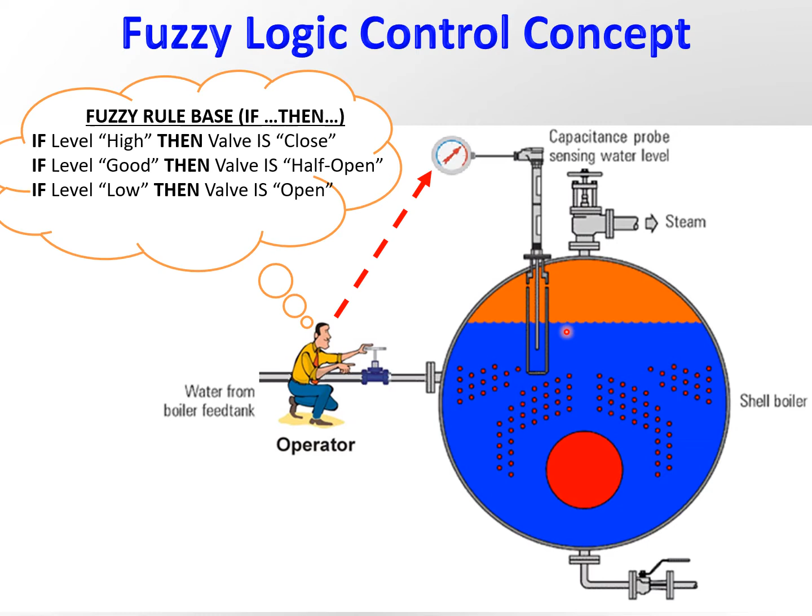The advantage of fuzzy logic is that it's comparatively easier than developing a model based where you have to get models and all that. It's robust in general, more robust than PID because of the capability to cover a huge range of operating conditions in a knowledge system, as mentioned before.

It can be customized to different areas and different systems, basically emulating human deductive thinking, as we've seen before in the example of controlling the boiler, designed to emulate human deductive thinking and to infer conclusions from what we already know. It's more reliable than conventional methods in non-linear systems normally, and is generally more efficient when applied in control systems in general, not specifically, but in general.

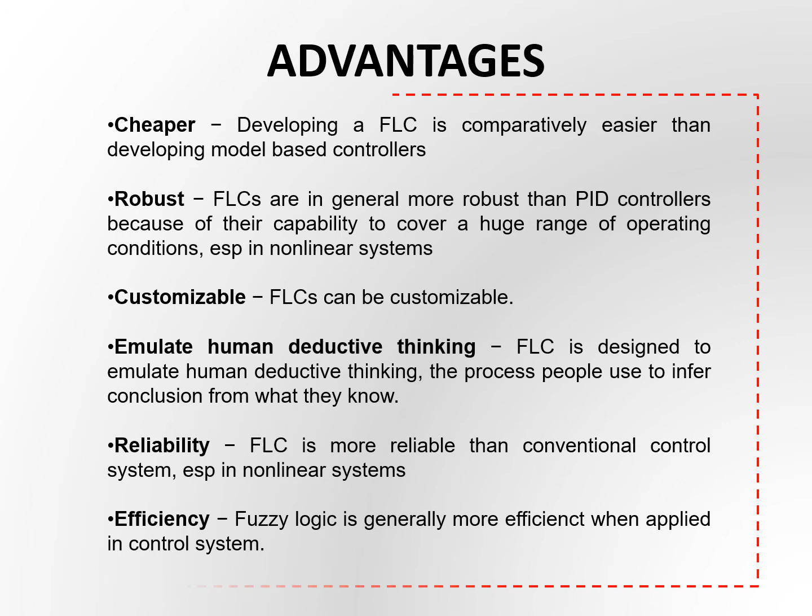Disadvantages: well, it requires lots of data. You need historical data to be able to design your fuzzy rule base, or you need human expertise. The accuracy of the system depends on the knowledge and expertise of the human beings in developing the rule base, and these rules must be updated from time to time.

Looking at the control system, as we've seen before in your process control class, we have the controller, final controller, process, and measurement device. So the same loop applies, except now the controller would be the AI or fuzzy logic controller, and the others should be similar in terms of the final control process and measurement device, but we may have more than just one measurement. The structure may slightly change, and the controller will change.

That defines the advanced control strategy. So why is this called advanced? Because of this issue of the difference in terms of structure and the controller itself.

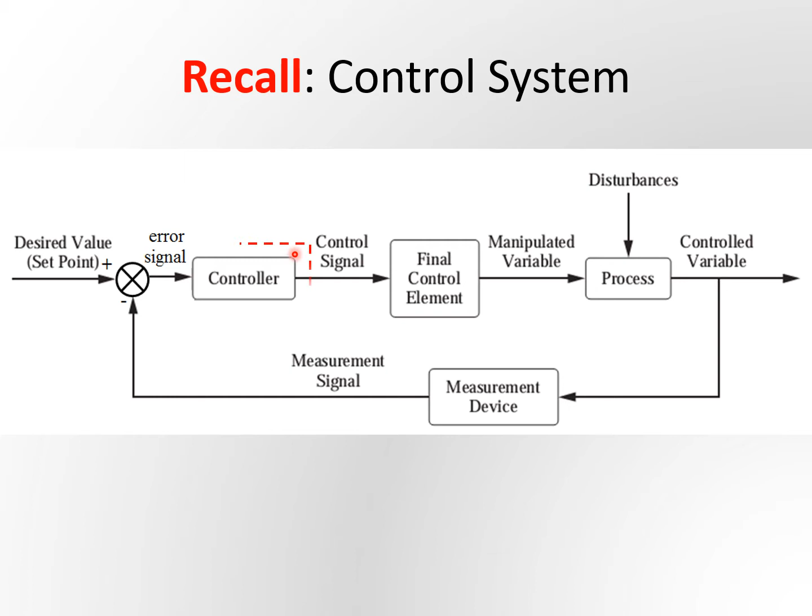For the fuzzy logic controller, we have the components mentioned before in the introduction class: the fuzzifier, which transforms the input data into fuzzy sets, the inference mechanism, and the fuzzy rule base as one part of the fuzzy logic controller. Finally, we get a few rules that fire, then we come up with the aggregation part where you come up with a fixed value from the defuzzifier. The defuzzifier converts fuzzy data to crisp, non-fuzzy, real data. There are two methods, but there are other methods as well.

There are four elements in the fuzzy logic controller. One is the rule base, premise, then consequent, which contains the logic quantification of the expert's linguistic description of how to achieve good control. The inference mechanism emulates decision making by interpreting and applying knowledge about how best to control the plant. The fuzzification process converts the inputs into antecedent fuzzy sets that can be used to activate and apply rules, and the defuzzification converts the action of the inference mechanism into actual inputs for the process. These are the four elements mentioned before.

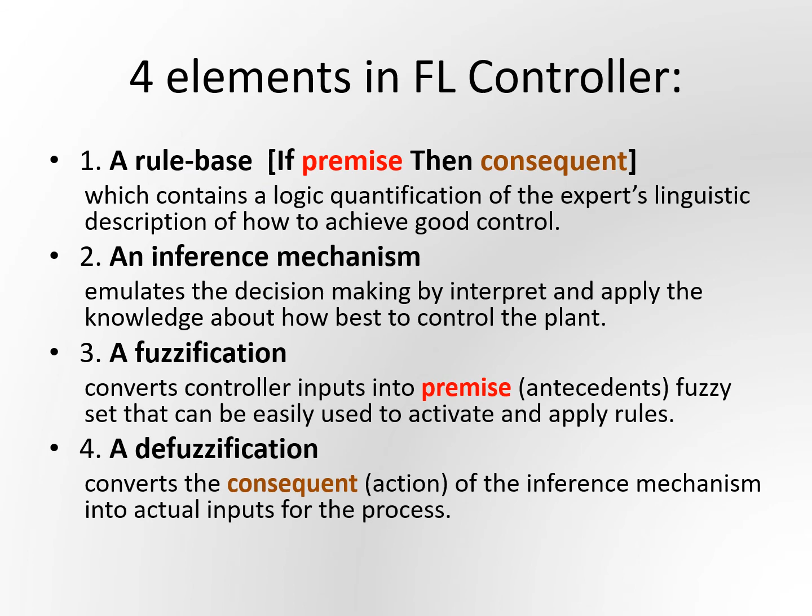Fuzzy logic design methodology: first is to choose the fuzzy controller inputs and outputs, then put the control knowledge into the rule base, then the fuzzy quantification of the knowledge, then matching which rules to use, then determining the conclusions from the many different rules fired, and finally converting the decision into actual action into the real plant. These are the methodology steps that we have to follow.

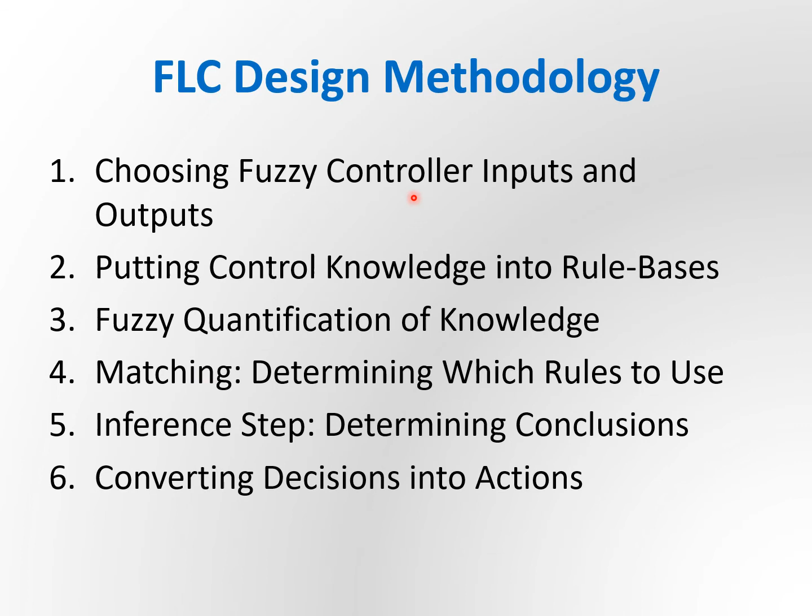The first step in FLC design methodology is choosing the fuzzy controller input and output. The expert knowledge will tell us which should be used as the input.

So there are many choices, but normally in some process, the first one is the error, set point minus the actual, and the change in error is also important. This relates to the process input values. The output depends on what you're trying to manipulate, and normally relates to the final element, how we can manipulate the process variable, in this case like height. So the output could be the valve opening and closing, or CV percentage, as we call it.

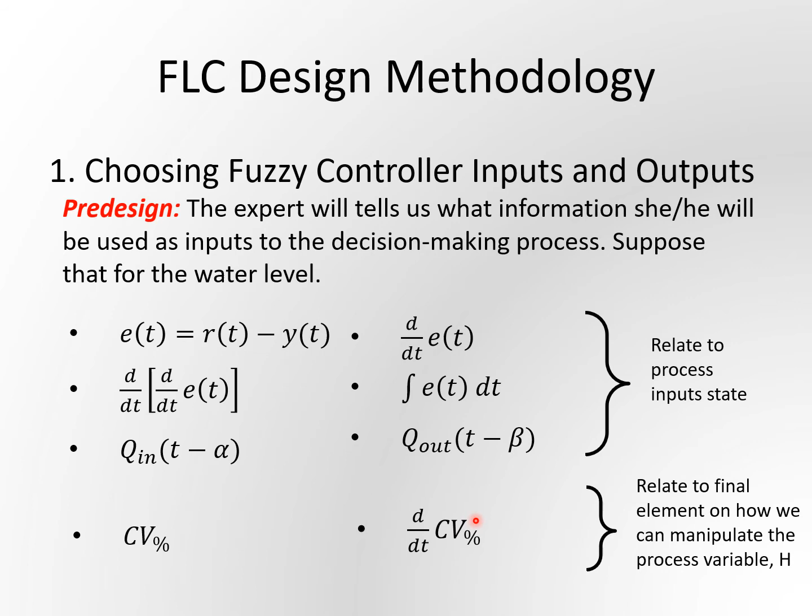In choosing the fuzzy control inputs and output, we define the linguistic variable for each of the input and output. For error, described as E, and change in error, described as the change in error - these are the variables. And the output, the valve rate, defined as the change in the valve opening. For each of them, we define its linguistic members, or linguistic values.

For input 1, we define the linguistic variable error into different linguistic members: negative large, negative small, zero, positive small, and positive large - 5 members. For the change in error, as input 2, we define 3 members: negative, zero, and positive. And for the output, as the valve rate, we define a few members: close fast, close slow, no change, open slow, and open fast - 5 other members for the output value.

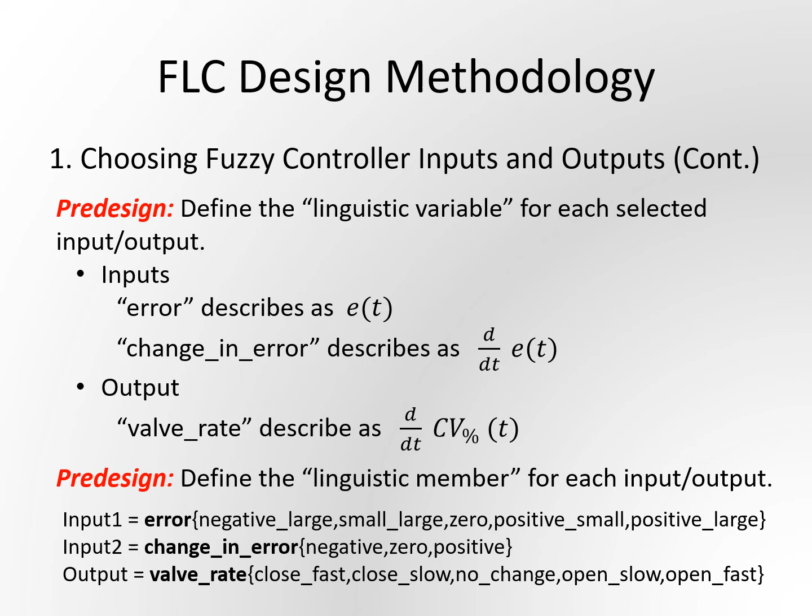So this is the fuzzy membership linguistic variables and fuzzy linguistic members. Next we go to the fuzzy membership. Before that, we would like to put them into a rule base. Suppose that the human knows a certain function of the plant in some natural language, so we can set up this matrix sort of thing.

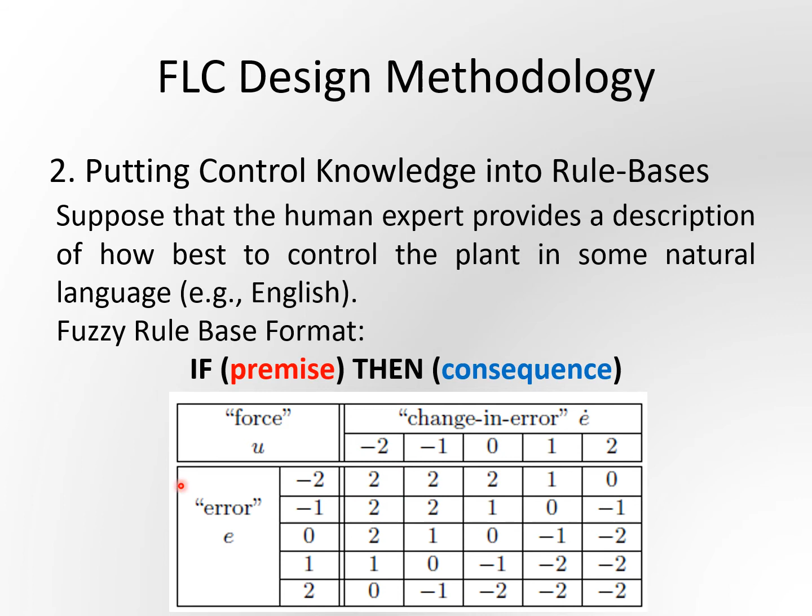We've been talking about this, but before that we also have to decide which membership function these members lie in. If you'd like to use a triangular, then you have to decide the triangular - what sort, giving the details of the beginning, middle, end, and so on. If you want to use a trapezoidal, then decide the trapezoidal definition or specification. If you want a Gaussian, decide the Gaussian, and so on. There are a few more, but these are the 3 common membership functions we define for the linguistic.

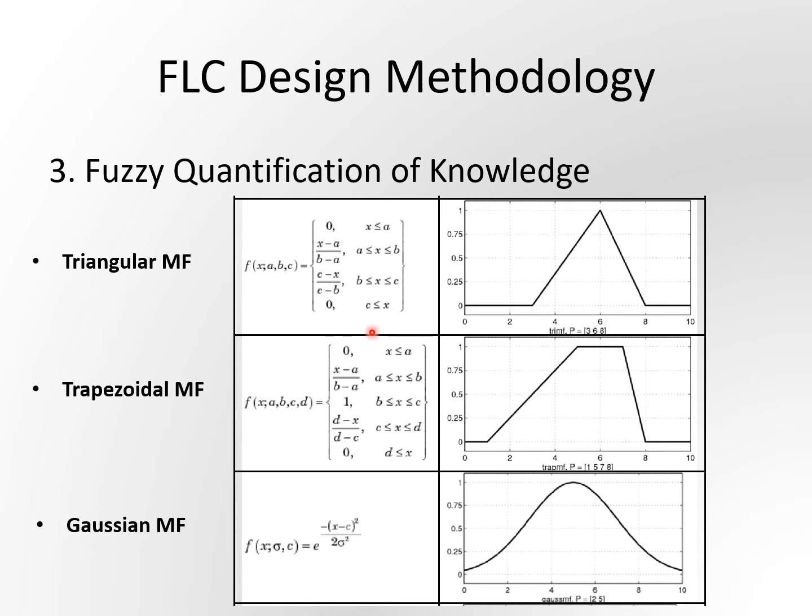Finally, we want to match - as we said before, we want to match the rules - once we have the input values. For example, if we have an input E equals 0 and change in E equals 0.3, then we have 2 rules fired here. Looking at this: error is 0 and change in error is 0, and error is 0.

If one rule is fired where change in error is 0, then we can use this rule - basically 0 here, the force is 0. Another rule: if error is 0, change in error is positive small, then the force is negative small - another rule is being fired. So these are the rules we have fired based on the input that comes in, in terms of the linguistic variables we have chosen, and in terms of the rules we have given.

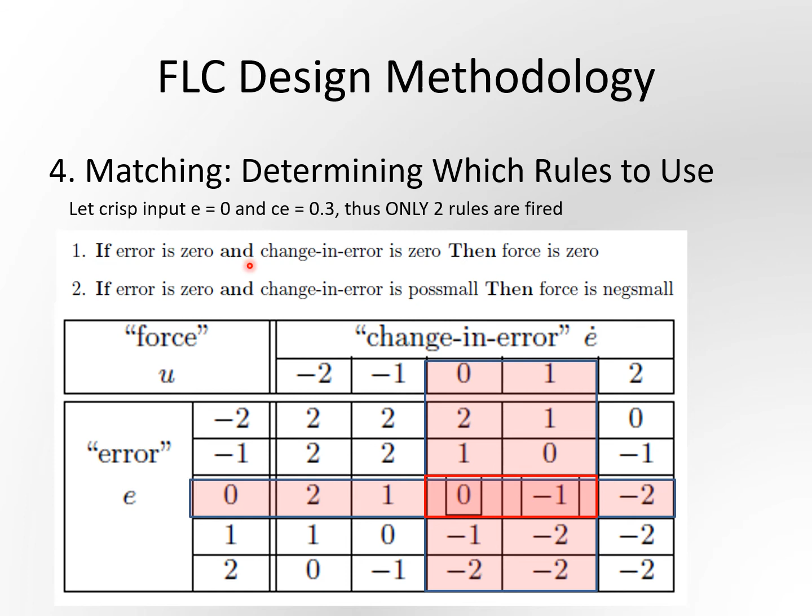So in this case, when we have change in error of 0.3, as I said, we can fire 2 rules: one with the 0 membership function, and one with the positive small membership function. Mu is what we call the degree of membership, from 0 to 1. So when we fire the degree of membership for 0.3 and 0, we get a value of 0.25 and 1 for the 0 part. And when we use the rules, we normally choose the minimum of them - take the minimum of those two, which is 0.25.

The other membership function for the other rules fires at 0.75 with the 0,1. Using the AND rule, we take the minimum of them, which is 0.75. So two rules are fired here: one with the 0 membership function at 0.25 degree of membership, and another rule using the negative small membership function at 0.75 degree of membership.

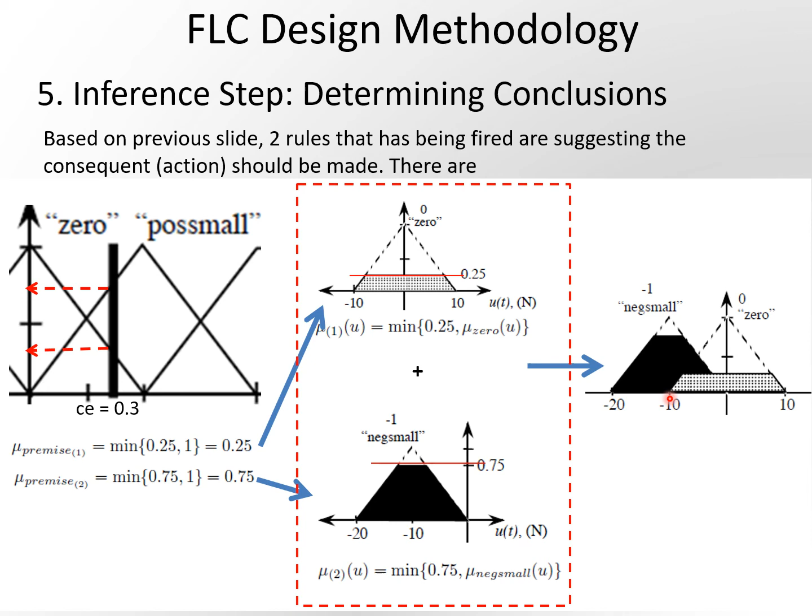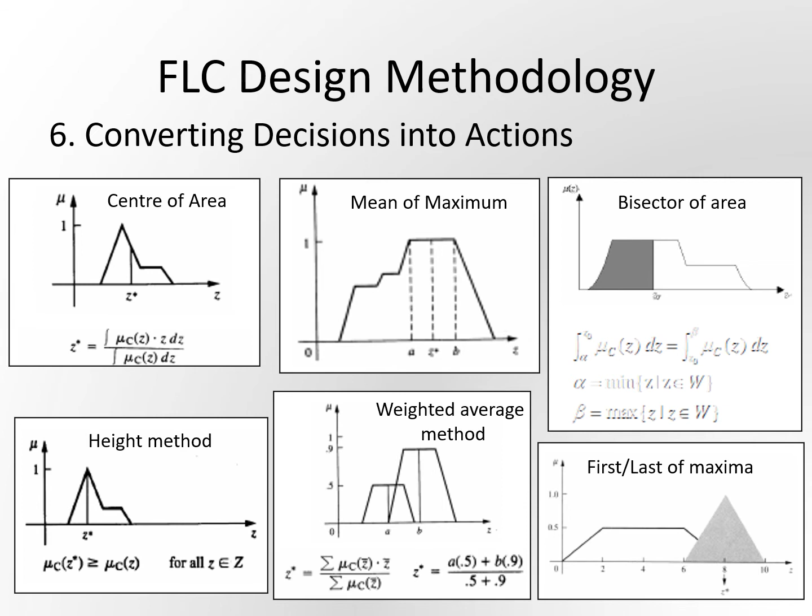So we go through converting the decision into action using the defuzzification method. We can use different methods: center of area, mean of maximum, and so on. Normally we use the center of area, or the centroid, or center of gravity method to decide, among the different rules fired, what is the final result. So we will use that defuzzification method.

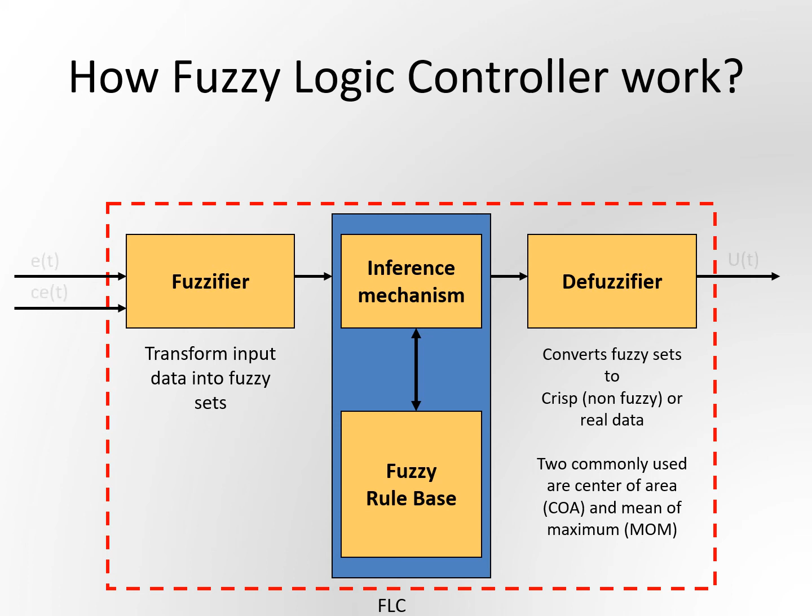We'll take an example now. If we use the crisp input E equals minus 0.5, and the crisp input for change of error is 0.6, we have two linguistic variables used. We call it, in this case, the linguistic membership in terms of x1 or y1, and the membership function is a1, a2, or a3 for the input x1. For y1, the membership function is b1 or b2, trapezoidal b1 or trapezoidal b2. So these are the two different categories of inputs.

The membership function for A1 will be 0.5, and the membership function for B1 will be 0.1. The second one, membership function for A2 will be 0.2, and the membership function for B2 will be 0.7. So these are the inputs that have been converted into fuzzy linguistic variables and their values.

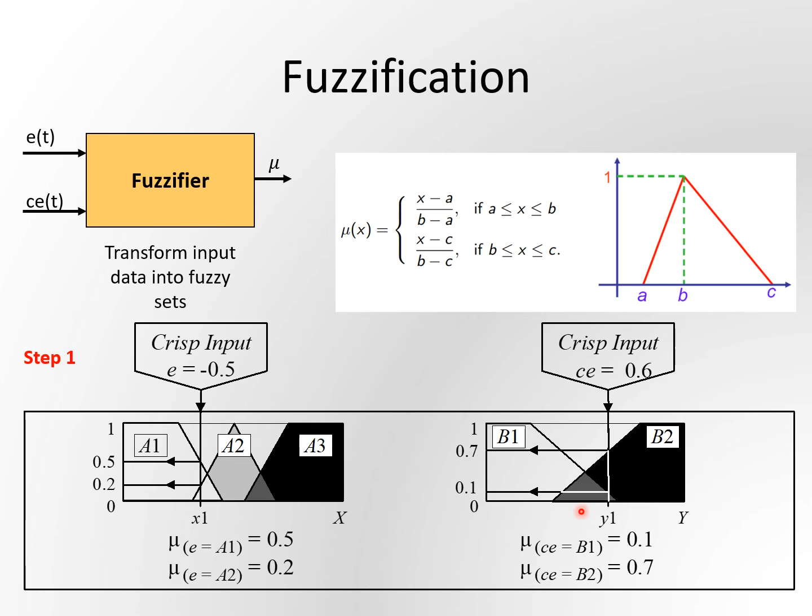And we have the rules already set: if E is A3 or CE is B1, then Z is C1, the membership function of the output. The other rule: if E is A2 and CE is B2 — B2 being the membership function for the inputs — using AND, then Z is the C2 membership function of the output. And rule 3: if E is A1, then Z is C3.

This is the inference mechanism combined with the fuzzy rule base to come up with a degree of membership and decide which rules to follow. So we said if A3 is fired and B1 is fired, then we use the OR value, which normally means the maximum of the values, which is 0.1. So C1 is fired with 0.1 degree of membership. If X is A3 or CE is B1, then Z is C1, with degree of membership 0.1.

For the other rule, if X is A2, triangular shape, and CE is B2, trapezoidal shape, we get a degree of membership of 0.2 and 0.7 respectively. With AND, normally we take the minimum, so the minimum of these is 0.2. So it's a 0.2 degree of membership for the output at C2 membership function, the trapezoidal membership function.

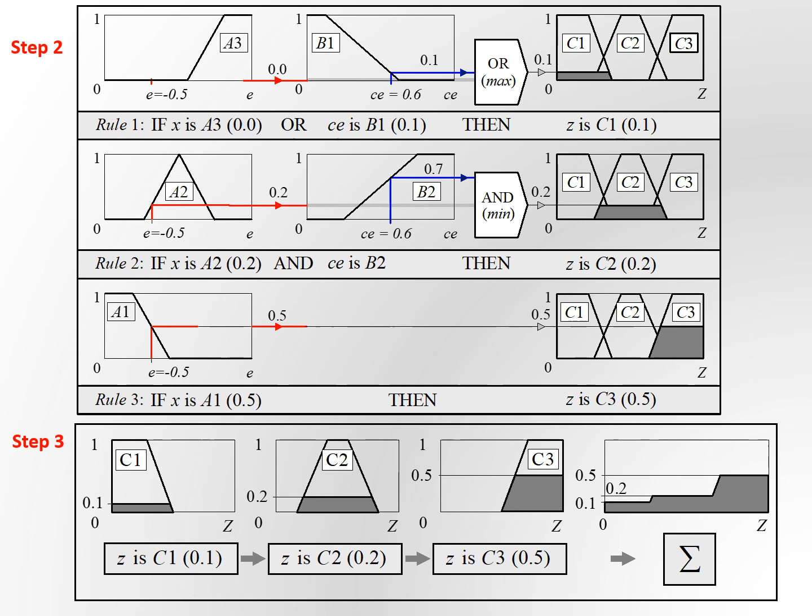So we combine and aggregate them to get the final rules output combined together, and then finally we have to use the defuzzification method to get just one output. You want only one output at the end. To do this, whether we want to use center of area, center of gravity, mean of maximum, whatever method we want to implement, we can just apply it.

In this case, we use the center of gravity, which is given basically by the area of the different parts plus this part, divided by the degree of membership for each of the different parts, 0.1, 0.2, and so on. So this is the way of calculating center of gravity. So the final value we get is...

67.4, and this is the crisp value, or the definite value, or the real value that has been defuzzified. The whole system has defuzzified. This is the value that is going to the output.

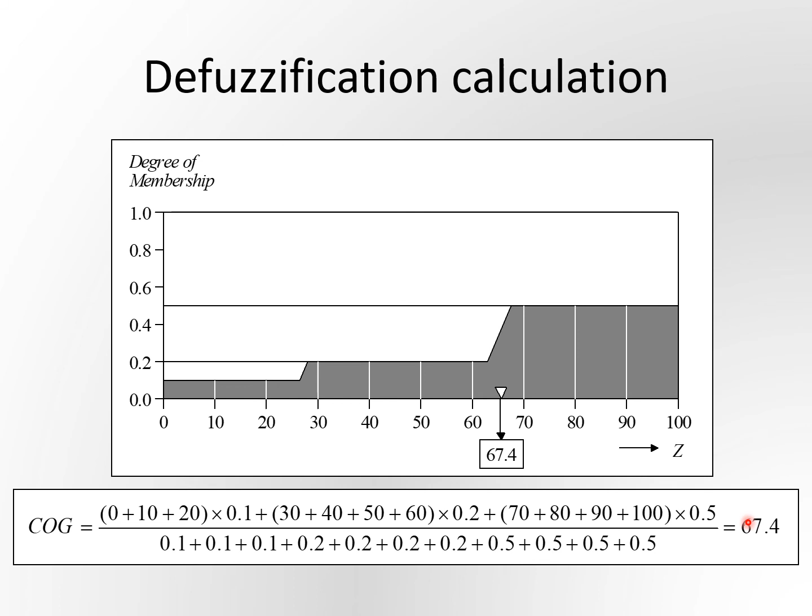That is the one that is applied. So this is the whole steps of a fuzzy logic controller, in this case controller, or any others that you may use, if not a controller. That's the way how fuzzy logic is going to work. But in that case, it was a controller because we talk about errors and so on.

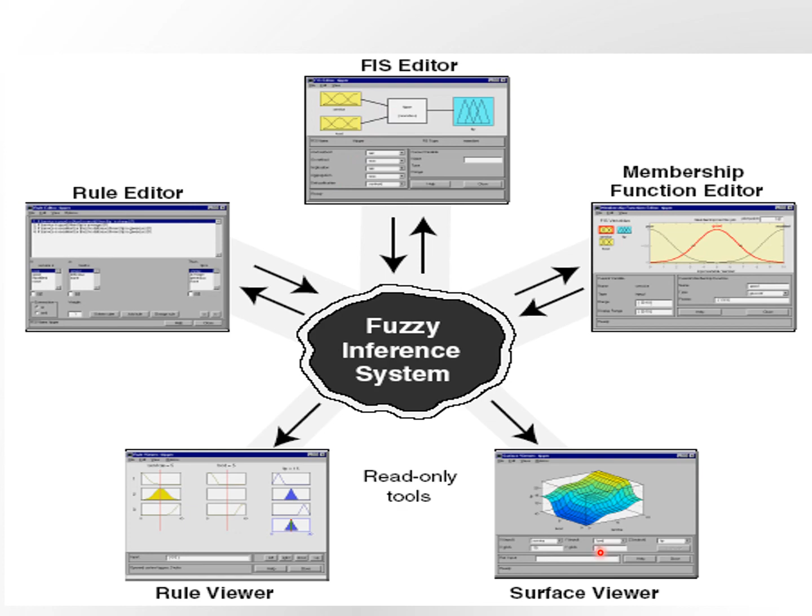And basically, we're going to use the MATLAB interface and choose the fuzzy inference system editor, the membership function editor, the rule editor, and surface viewer. As I mentioned before, these are the different parts of the MATLAB toolbox for fuzzy logic that we can use to design our system.

So we can define the input, output, and so on. Decide the linguistic variables and form the fuzzy associative matrix.

In this case we have the linguistic variables for error and rate, and the values such as increase, no rate, decrease, low, good, high for the inputs, and the output as open, mid open, and so on.

So it depends on how you define the linguistic variables and their values, in terms of fuzzy values, yeah, open, mid close, and so on. Just now we talked about tall, short, fast, loud, in terms of the linguistic variable height and so on. So these are the tables we can use.

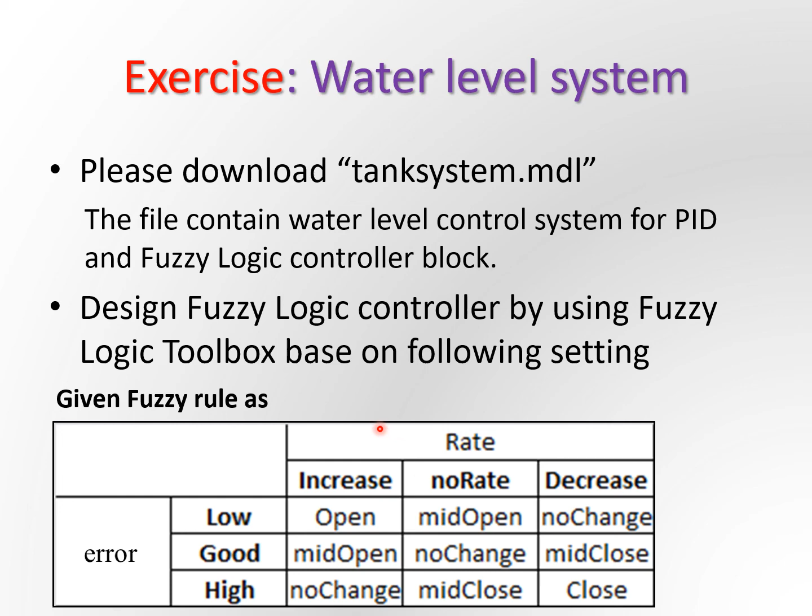These are the fuzzy rules we use, and then all the other steps that we have mentioned before in the fuzzy logic toolbox.

The difference is in the defuzzification part, where the output is a function of all the different rules fired - function of the first rule, function of second rule, plus the function of the rule, to get out the Sugeno output.

But Mamdani output is what we have studied before - different rules fired, aggregate them, implement the defuzzification, and get the output. So it doesn't matter which method you use, but in the toolbox, most of the time we can easily use Mamdani because it's so very user friendly.

And so we decide the AND method, what sort of method we use, the OR method, or so on, what are the inputs, and what are the range of the inputs, what the membership function, input 2, what is the range, and what is the membership function, output, what is the range, what is the membership function, what is the name, and so on.

So define this specification into the MATLAB toolbox for fuzzy logic, and then we can easily design any controller, any system we want. As long as we know the basics, as I said, the way we choose the variables, the output, the range, the membership functions, all makes a difference.

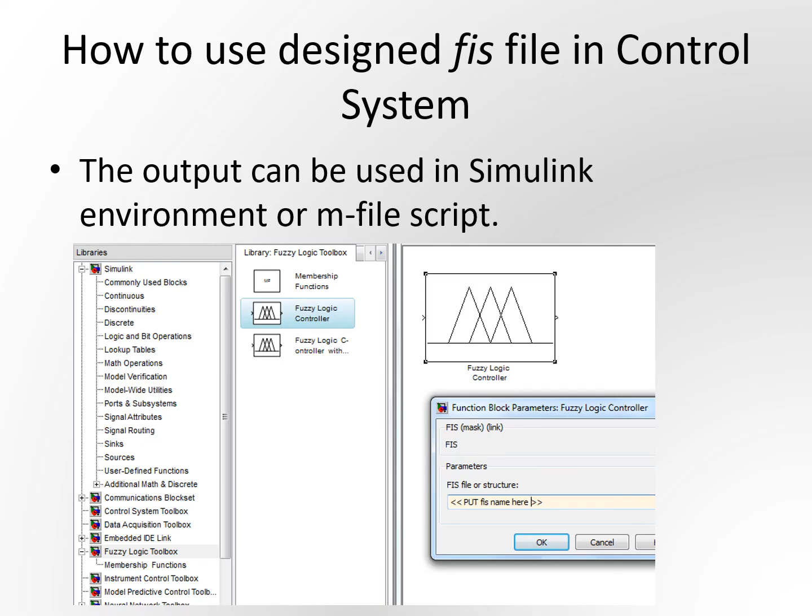So this is the final sort of fuzzy logic controller you can call for, and that's all.